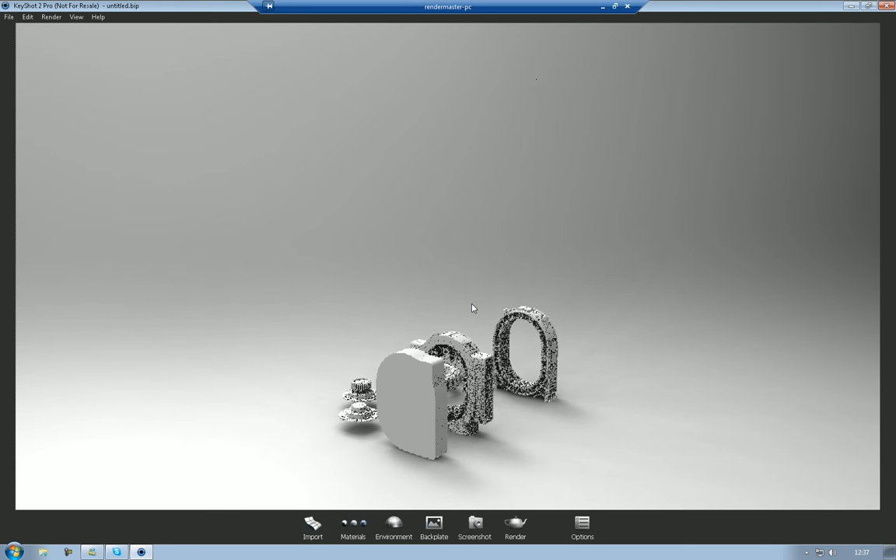Okay, that's interesting. Let's have a look and see what it's done. We have this solid block of geometry, which makes me suspect I haven't properly reset the X-form on these. But never mind, let's have a look nonetheless.

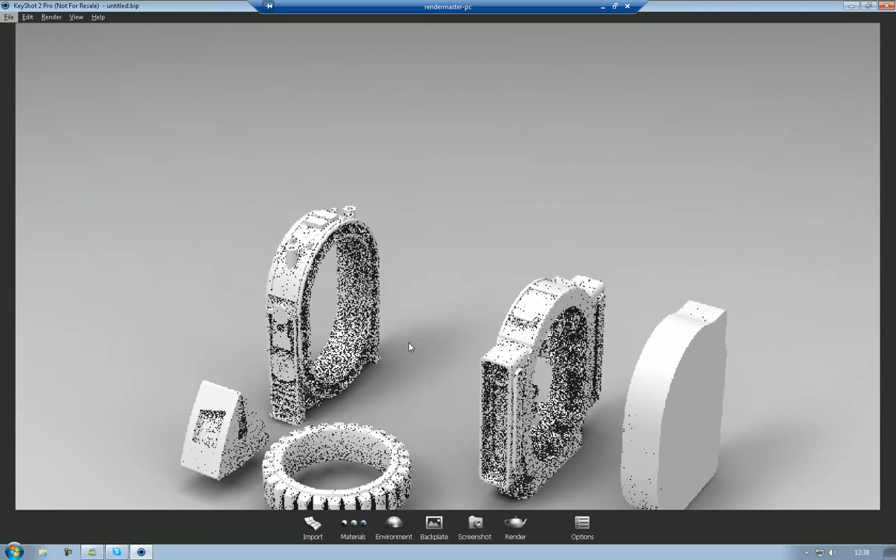Yeah, it's a teeny bit on the messy side. Oh, I see what this is. Never mind, I'm going to hide this part. Oh, they're all the same part, aren't they? Okay, let's undo the hiding of parts.

I'll just Photoshop those out of the way later on. Look at that, it's the way it's skinned - that's amazing. Never mind, I just want to see what these are going to look like and if this is actually going to render or not.

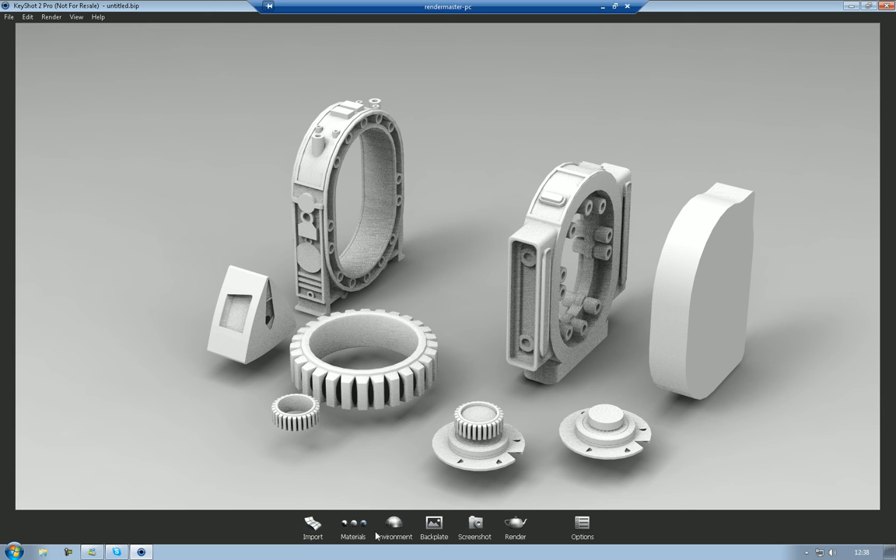So, materials, let's have a look - metals. I'm just going to apply... have we got a lighter gunmetal? Yeah. Shift, crunch, bammo. And now everything's gunmetal.

Polished steel, let's have a look at polished steel. Yeah, that's actually exactly what I was looking for. That's bizarre and cool at the same time. I'm surprisingly pleased with that.

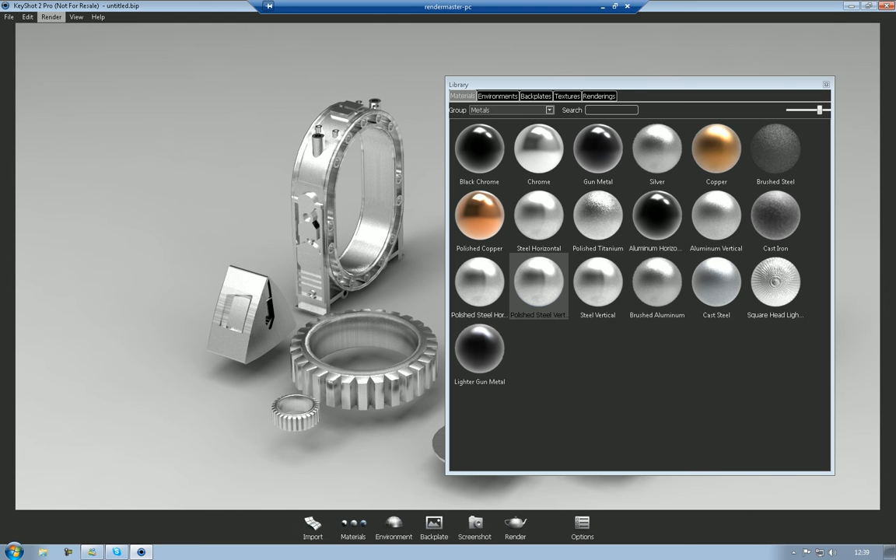Let's try 3ds format then, see what happens. So here we are, and export. Let's see - 3ds, we'll call it motor part. Yeah, why not?

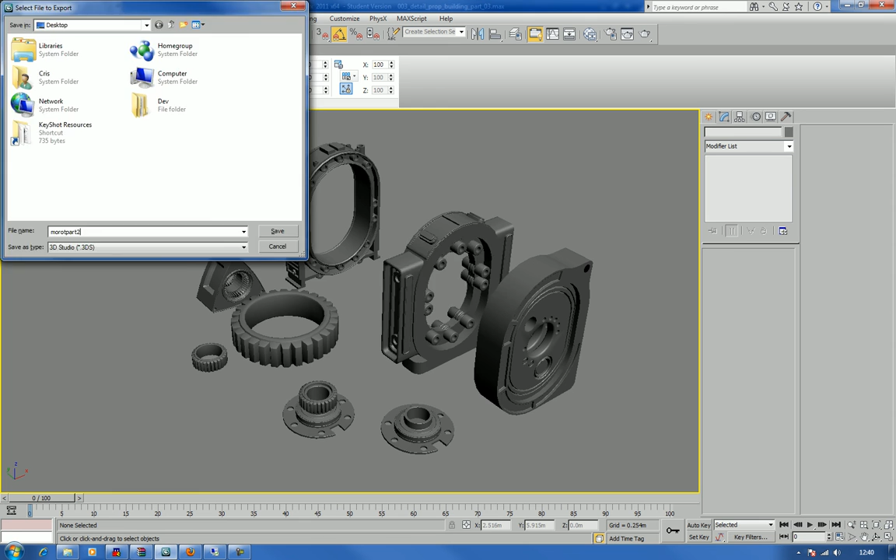Well, it hasn't crashed out immediately, so that's probably a good sign. What I'm going to do now is just copy the file across on the network - it's only 3.2 megs, so it's not massive - and I'm going to stick it on the desktop. I've got this on my other screen because you don't need to see what I'm doing over here.

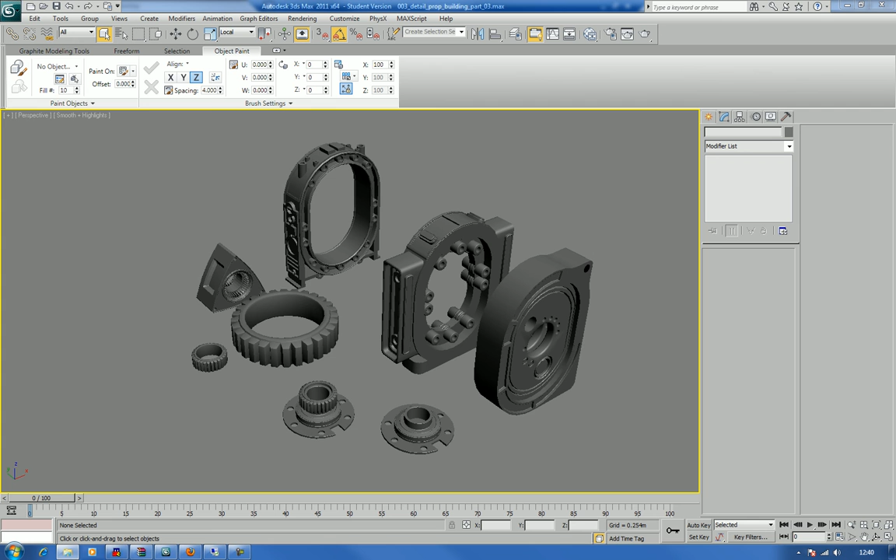Okay, and now that's copied. There it is. I'm not going to merge it, I'm just going to completely replace it, and see if that does anything to the geometry to improve the situation. Because I'm wondering, to be honest.

Because I know Filmbox format, when I exported to it, threw up quite a few errors, and I suspect a lot of that is to do with the fact that I'm going to have to repair some of those surfaces if I'm going to export it as Filmbox format. So I'm kind of intrigued to see what it's going to do once it's imported, which will take a little while. There we go, here come a million trillion verts.

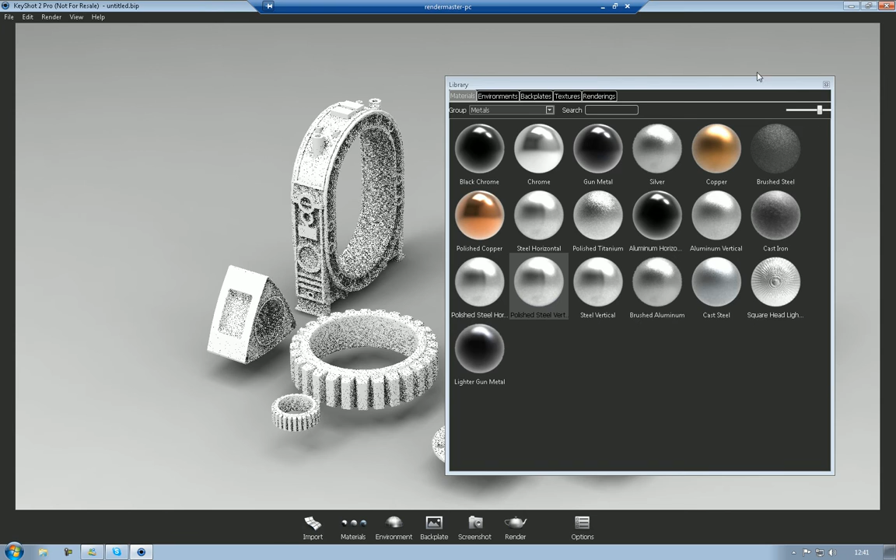And there you go, look. You see? There's my boy, eh? That's what I was hoping for. That's much better.

Alright, let's try it with a little bit of metal and see how that looks. No, I was using polished steel vertical, wasn't I? So click, click.

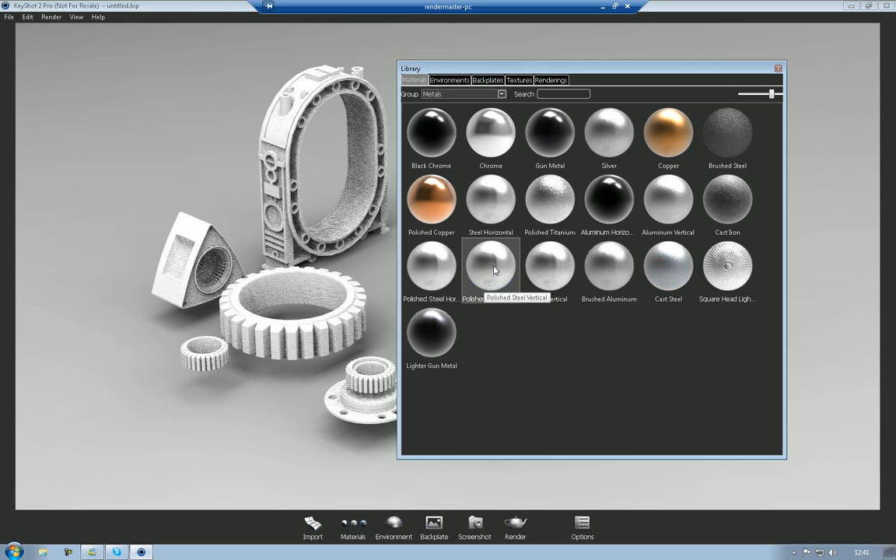Oh nice, it's exported it all as separate models as well. Click, click, click, click, click, click, click.

Maybe I'll have this one as a gunmetal. There we go, just for the sheer novelty.

And those were verticals. I'll have polished steel horizontal for this one. And this one.

And what's this? Is this brushed iron by any chance? No, it's brushed steel. Perfect. Let's see how that looks on that. Bloody awful. Excellent.

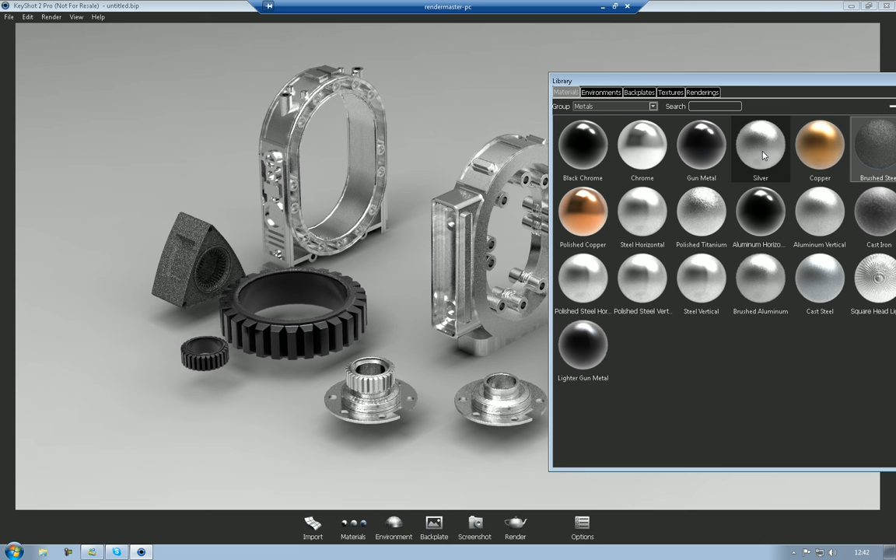But nonetheless, I quite like it. Let's see, cast steel - I'm going to have for this one instead. Give it a bit more element of shininess, because it would have been cast anyway.

And let's see how... Oh, lovely. I like that.

What shall I use for that one over there? I think I'll use steel vert.

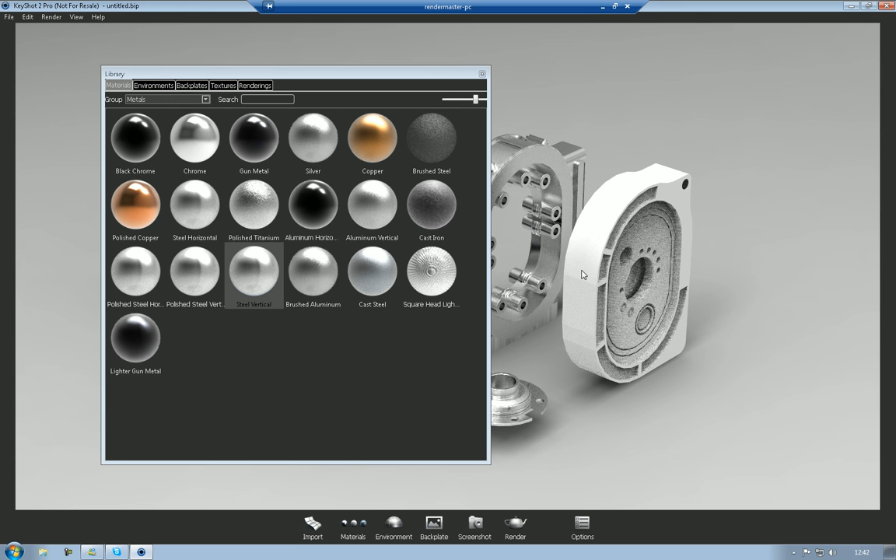See, I haven't applied enough smooth to that, which is why the edges are a little bit on the wonky side, but never mind. Yeah, I like that. They're actually looking okay.

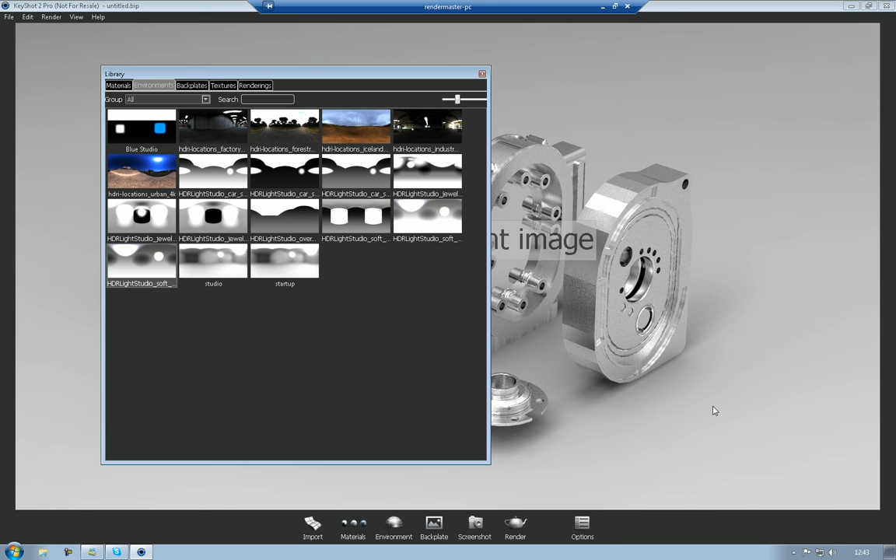It's ridiculous, really, just how easy it is to make your model look nice using this. Here we go, I'll just drag in a different HDRI image. See? There we go, HDR Light Studio.

Or perhaps if I want an industrial look, industrial location. And you can turn off the background so you don't have to look at it. That's the one it starts up with, which is also known as Studio.

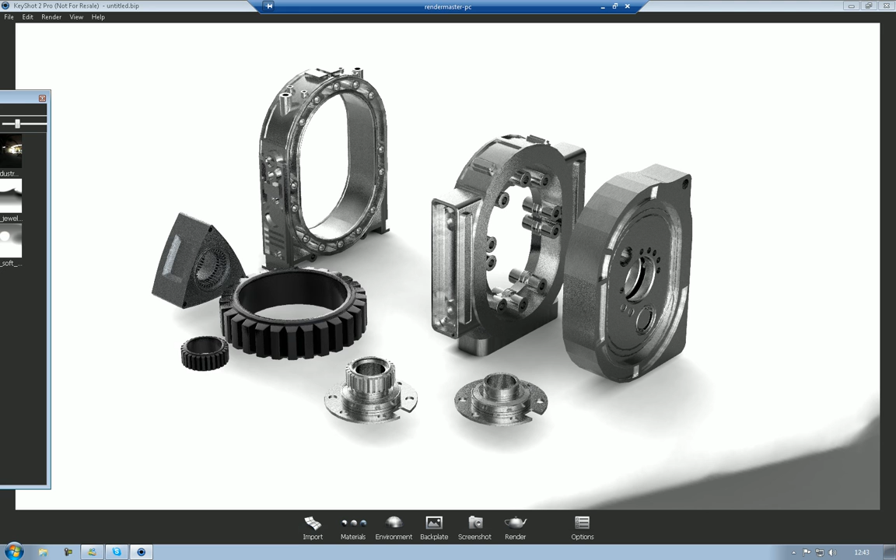There's another one. Let's have a look at that one. It's quite stark, actually. I was wondering why that window wasn't going onto my other monitor, and it's because I've got an RDS running - sorry, RDP.

There, that one will do. That's a kind of car lighting system anyway.

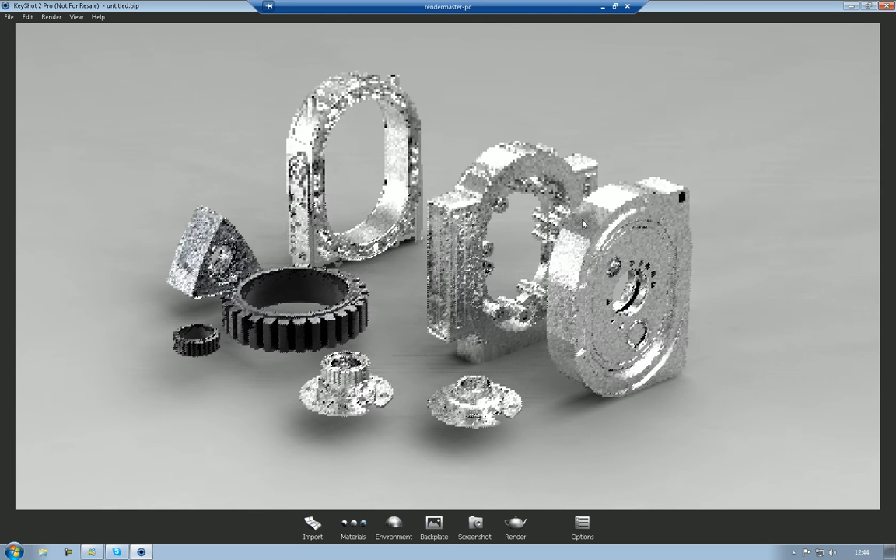I think I'd like to carry this material onto this one, so I'm just going to left click on this and right click on that, and then it'll copy the material across for me. Overall, actually, that's quite nice.

Okay, so I'm going to leave that to render, and then I'm going to grab it as a screenshot, and then I'll get back to doing what I was doing, which was recording even more tutorial.

I wonder if I should bother putting some wireframes up. You see, this is the kind of trains of thought that I have. Go figure.

It's interesting because looking at these, I can see how these are going to make the various parts and how they're going to start holding together. And I can see where finger joins are, and where all the important parts are going to come from just from looking at this bit. So it's quite cool. Alright, I think that should do it.